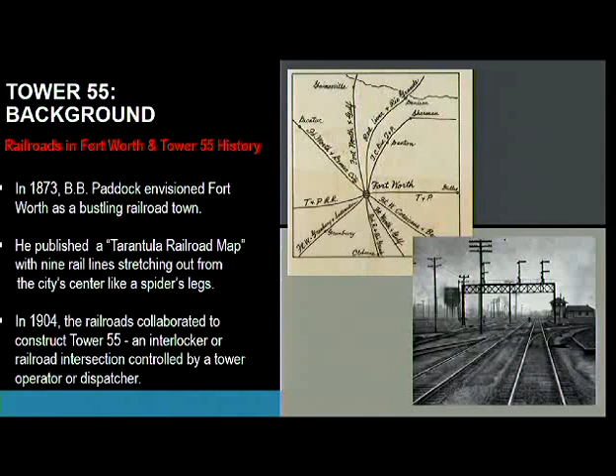So, like was mentioned before, after a century of functionality here, Union Pacific and Burlington Northern Santa Fe currently are the two Class 1 railroads who meet at Tower 55. Amtrak has 4 trains that are also served by the tower. The different cargoes that are brought through are intermodal goods, agricultural products, coal by the tons. Half the traffic's probably coal trains, then industrial and manufactured goods.

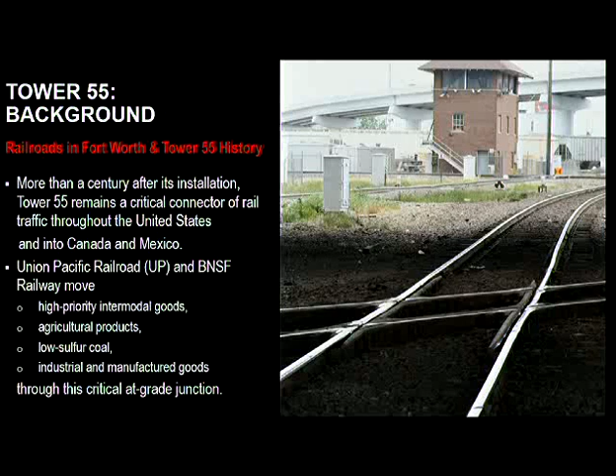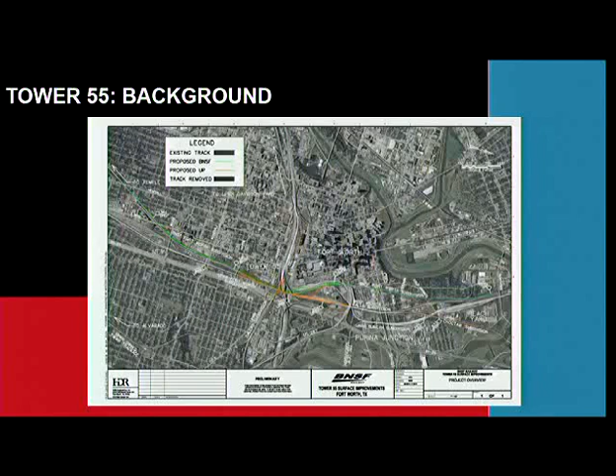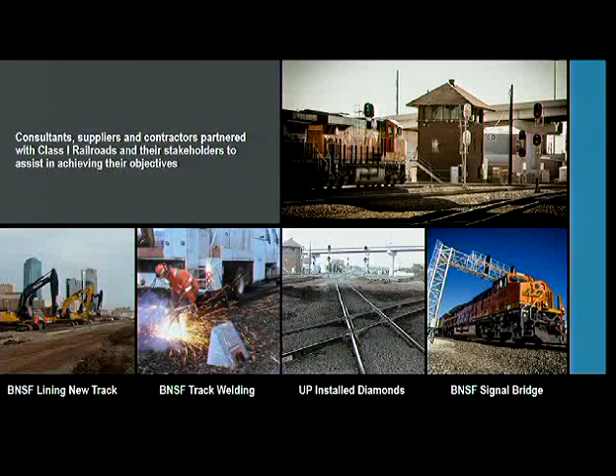Now, consultants, suppliers, and contractors all partnered from the pre-bid process, developing what materials were going to be required or would be best suited to the project. We met with BNSF and Union Pacific, as well as Amtrak, and other outside stakeholders, including property and land developers adjacent to a couple of the crossings that were closed, and grade separations which were improved. We also met with Fort Worth Independent School District as well.

Now, from the get-go, HDR assisted the railroads in multiple facets. One thing we did, we assisted both railroads in the modeling. On the BNSF side of life, their transit times had increased more than 30% since 2002. And some of their trains were staged all the way from the Oklahoma state line and southward to Temple, where it begins 2 new subdivisions. They'd be staged there for approaches into Fort Worth. That impaired their growth and sustainability at Alliance Intermodal Facility, which is located just north of Fort Worth.

Union Pacific, that impacted more of their east-west traffic, which they would stage 30 miles to the west in Weatherford, all the way out to Abilene, which is 130 miles west, to approximately 80 miles to the east of Dallas. And this impaired their services to their South Dallas intermodal facility, which is less than 10 years old and still increasing in traffic.

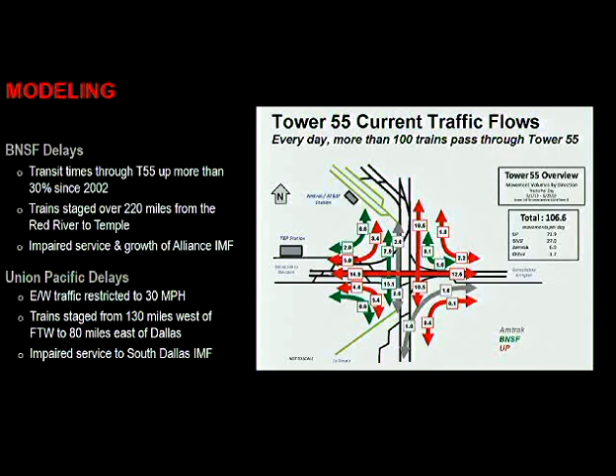We also assisted the railroads from the financial standpoint. When this project started, that was before President Obama was elected. Therefore, a lot of the funding that we used didn't even exist. But once he was elected and instituted the TIGER funding, it changed the whole program when the railroads went and applied for public funds.

So we assisted the railroads in developing the applications, the paperwork, the reports. We worked with the BNSF and the Union Pacific, as well as the FRA, and TxDOT was the sponsoring agency in Texas. So once we obtained TIGER II funding, that was $34 million from the USDOT. The breakdown of how the funding was for the project: Union Pacific $39 million, BNSF $37 million, the $34 million from USDOT. Our local council of governments was $2.5 million, TxDOT $1 million, and City of Fort Worth $1 million.

Then from the engineering and management perspective, they had a preliminary 10% design that had been developed by another firm as well as with the railroads, and base agreements or handshake agreements had been made, but nothing in writing. We took those 10% design plans, evaluated them, saw some problems that would have stopped the project, like going through the oldest cemetery in Fort Worth and knocking out 13 graves. But, you know, things like that. We made some modifications, took it back to the railroads. They approved them, and we forwarded the design.

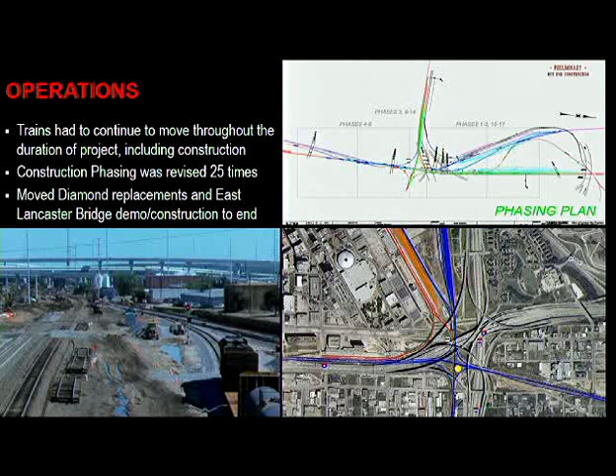Right here at Tower 55, the diamonds where the tracks cross each other, those had to be replaced. They were a 2x2, 2 tracks going over 2 tracks. Those had to be cut out, and we replaced them with 3 north-south diamond tracks going over 2 east-west. Then we also had to replace a bridge that both railroads ran over. Both of those bridges were actually separate, even though they appeared to be a single bridge, and we did that in phased demolition and reconstruction as well. What we did, we moved it to the end of the project, which expedited the overall project schedule.

Now, when we were looking at the structures, some of these great improvements, from my particular standpoint, working with the BNSF, this is one particular bridge. This was a 9-foot, 9-inch vertical clearance, just barely wider than a single lane of traffic, and it was skewed. Emergency vehicles nor school buses had ever been underneath the Santa Fe BNSF through its history. So we took that, we envisioned this, and then this is what was actually built. We went from this phase to putting retaining walls, additional sidewalks on each side, so we improved pedestrian safety and access to the schools and future businesses and residences.

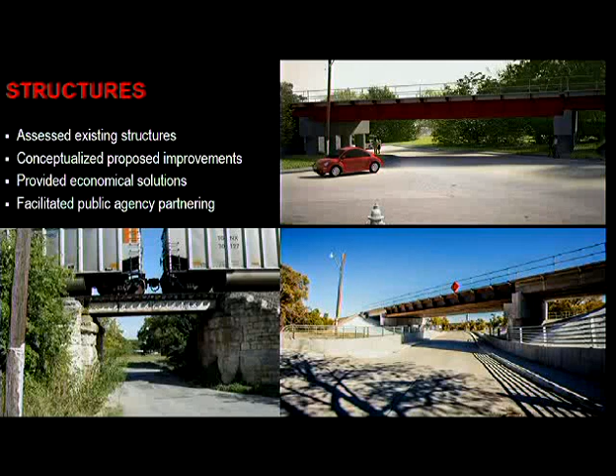Then on the track side, this is where Tyler and I had a lot of fun modifying things multiple times, but we developed track alignments based upon the operation models that were handed to us by both railroads, and then we helped meld both of their programs together in the design phase, even down to making sure the survey was tied together on the same state plane coordinates, so we knew where the track centers were in relation to each other in real space.

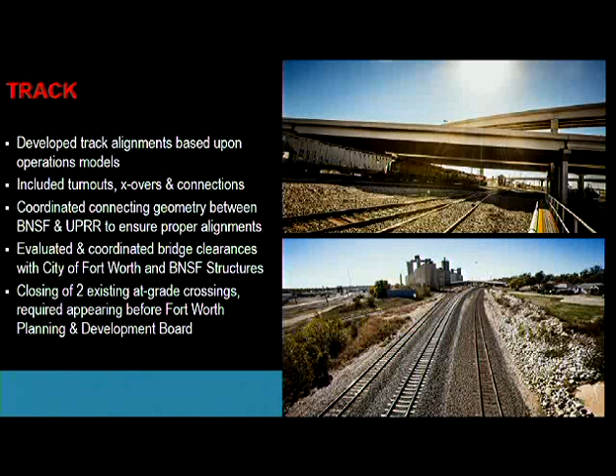We also evaluated and coordinated the bridge clearances through the City of Fort Worth and both railroad structures departments. We ended up closing 2 existing at-grade crossings to improve traffic flow, rail traffic flow, and improve bicycle and pedestrian traffic for a local school.

With a project of this magnitude, it wasn't just moving a bunch of tracks around. If you move tracks, you've got to move signals as well. And like I said, both railroads improved their block signal system. Their signal and communications also included PTC coordination and installations. This is one location where the BNSF was installing one of the PTC control units beside the signal block.

But with the final track design, the signal guys always want to see the final product versus working with you from the get-go. And that was a little bit of a challenge, but we were able to get plans developed far enough along where we could provide it to them, they could begin working with their designer. And we ran pretty parallel right up to the beginning of construction, and then the signal guys had to wait till about halfway through construction before they could start getting their foundations and facilities set in the ground.

Let's see, we also provided additional signal equipment, the berms for the bungalows to be located, the signals to be located, generator houses and such. And even at the end of the project, the railroad came back and said, well, we want to be able to have alternative power, so we were providing gas energy sources to them rather than just electric. So it was always a moving target.

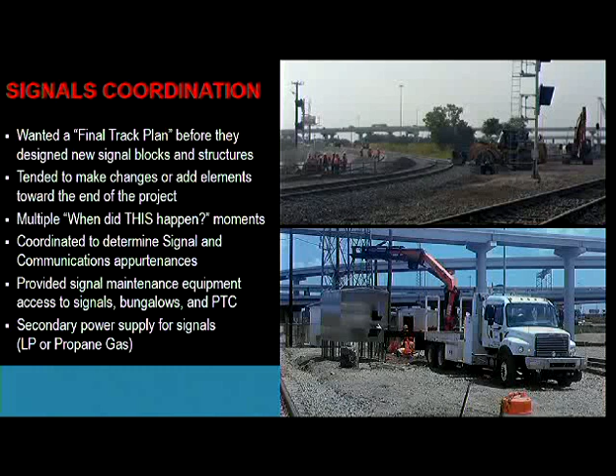Then with the city coordination, we went through the City Planning and Development Board for closing the 2 crossings. We coordinated through the Fire Protection Engineering Department to ensure that we had emergency access during traffic phasing. We were also installing traffic signals for 2 intersections. Since we were closing 2 existing at-grade crossings and improving clearances, we changed how the fire department and the police department had ingress and egress to 2 separate neighborhoods adjacent to the projects.

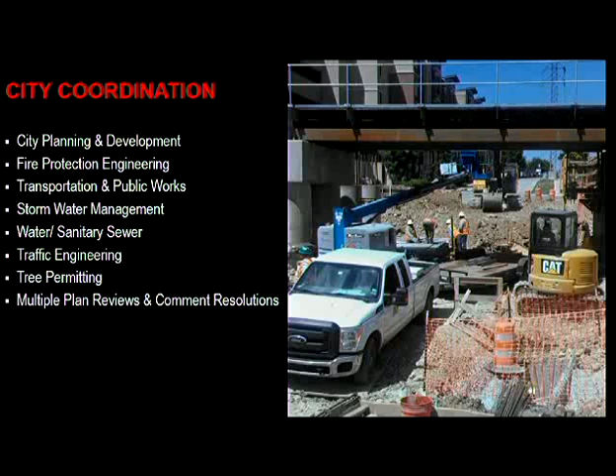We also worked with Transportation Public Works, the storm sewer, the water department, traffic engineering. Tree permitting is always an issue with most large municipalities. And then we have multiple plan reviews and comment resolutions through the city.

Now, adding value to a complex project, sometimes that sounds overwhelming. Other times you think, well, that's nothing. We can do it. So you go and you have to do an analysis on your project and how you can best provide logical, timely, and economic solutions with your clients, not just for them. And when I say with, that means being involved in a dialogue. You work with them to a level where you gain their trust and they understand your professionalism and your knowledge. So you work as a team to provide the best solution to their problems.

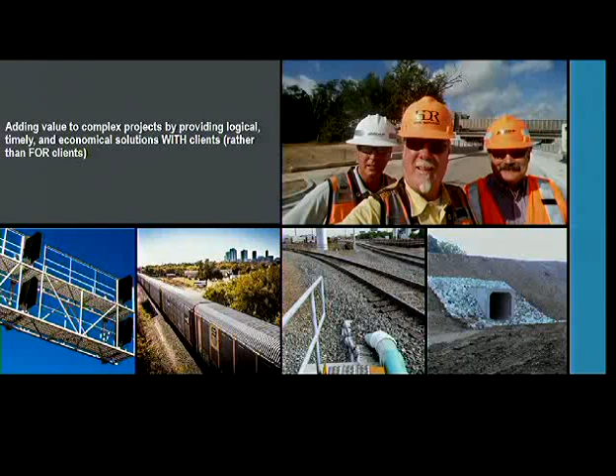Now, this is a real issue, and sometimes it's really simple. There is a way to save time and money, and always remember, time is money when you're in the construction phase. During the design, we had a really tight right-of-way along the BNSF, and this was a series of 5 conjoined buildings, distribution buildings, that would have been multiple $1 million. But what we did, we recommended a retaining wall with adequate clearance from the back wall to the railroad right-of-way.

In this photo here, during the construction phase, the contractor was having a hard time staying within his own schedule. So what we did, we had a conversation with the contractor and the railroad and recommended removing the lime stabilization, or the chemical treatment to the subgrade, and we recommended biaxial geogrid material to be installed, which saved money all around and then saved time, because we probably saved a month worth of cure time on the subballast if we'd installed lime. Another example, bridges are always more expensive to build and to maintain through life cycle.

So this bridge really wasn't there for drainage. It had been built at a time when this section of Fort Worth was more agricultural, and there had been an irrigation trench coming through here. It no longer functioned that way, so we recommended and designed and installed a concrete box culvert. It's backfilled. They don't ever really have to look at it but once a year.

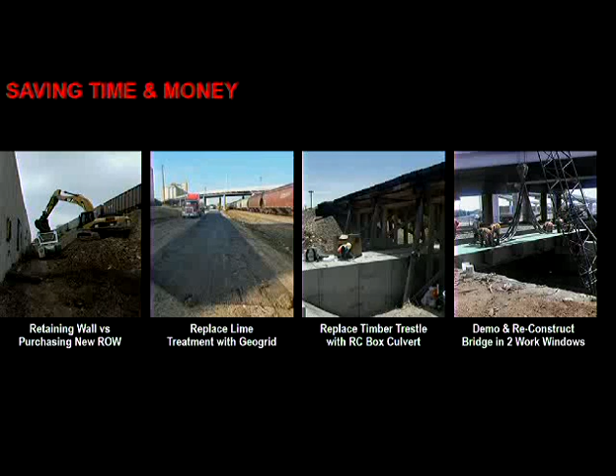And then this is where we moved the demolition and the reconstruction of 2 bridges to 2 consecutive weekends at the very end of the job, like 3 weeks before all the track was completed and we were preparing to walk away from the project.

So then we have the construction management team. Once we were out there, I had a staff of 6 people on a daily basis, and we developed the materials testing schedules. Remember your concrete lab and all that, everything you learn there, it actually gets executed out during construction.

We developed construction observation schedules, as well as the folks out there looking at our structures, our bridges, our culverts, our retaining walls, everything that, then when it came to the city construction, we coordinated and provided information to the city inspectors and engineers as well.

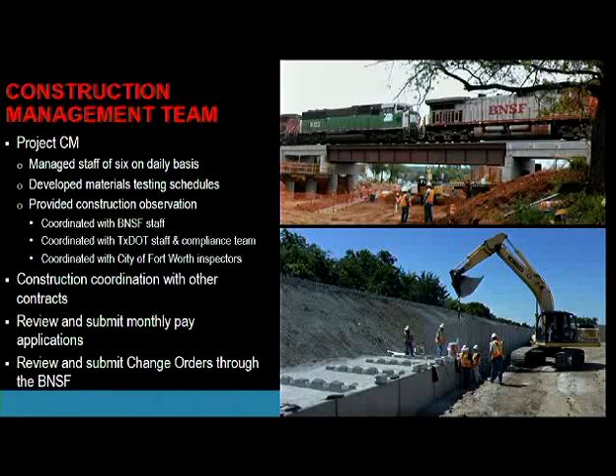Our responsibilities also included the paperwork and the change orders for the railroads, as well as coordination with the state and U.S. DOT on a monthly basis. Project safety. That's something a lot of people take for granted, but it can either save your life or get you kicked off the project if you're caught not being safe.

Some of the instances that a lot of times you take for granted is just how close or what kind of equipment you're working around, even if you're not in control of it. This is railroad's track gang, but you see the back end of that track hoe lifting up off the ground, and they're moving and pulling that track. If a chain breaks, you don't want to be in the way of shrapnel and projectiles.

Sometimes you're working close to live tracks, and there comes a train at 30 miles an hour passing by you, or you might be up on adjacent structure with live traffic. You've got different materials you've got to be aware of. Even with concrete, you can get chemical burns. You want to make sure you're paying attention to what you're doing, or overhead movements of structural materials or other materials being delivered.

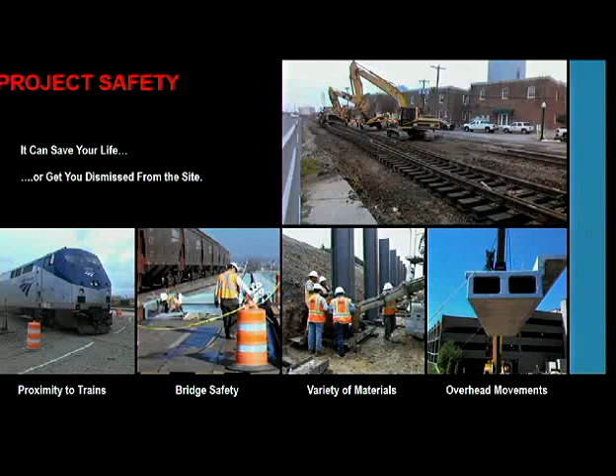Some of our construction observation activities included the placement of bridge girders and cast in place components of the bridges, be it the drill shafts, placing the cans, the rebar for reinforcement, and then pouring the concrete for the substructure, and then setting the superstructure like shown in that last slide.

Also, during embankment construction, you're testing your moisture and density as you build up every half foot to 8 inches. Sometimes you have differing conditions, not only the weather, but we did night work out here as well, sometimes required 24-hour cycles.

This is where Union Pacific was working in the summer, I think in July of 2014, the night they removed the existing diamonds, excavated the old sub-ballast out, put down geogrid, asphalt material, sub-ballast, and then had a huge crane drop the assembled 3x2 diamonds in place and set them up, and they had slow order, but they had trains running by 6 the next morning.

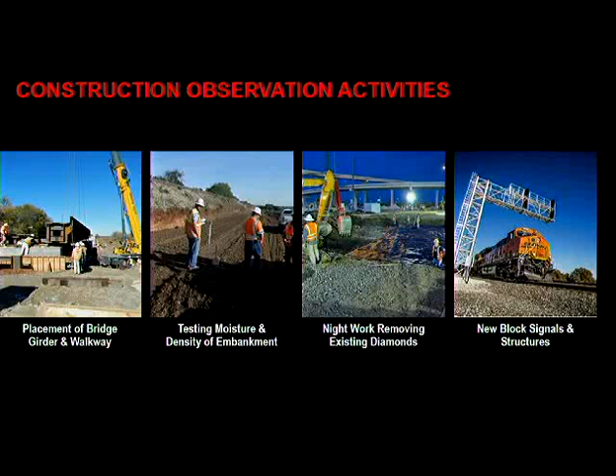And then, like I said, too, in working with the signal department, you have various kinds of structures, different types of signals on wayside or overhead, as well as their appurtenances.

I'd been in transportation for probably 20 years and working in railroad for 5 years, and I never got the chance to be around the track laying machines. I was always out there getting all the civil work done, structures, having everything ready for the track to be laid. This particular series is the BNSF's track laying machine.

And what they do is when you have the sub-ballast ready and approved by the engineer, they will line out all this continuous welded rail adjacent to where the center line track is already surveyed in and staked and string line. This is actually a train. They have multiple flat cars with concrete ties ready to be set down, and this yellow portion of the train is actually a bridge, rubber tires on the front end being pulled by a Caterpillar dozer, and as it creeps along, it sets all the ties in place.

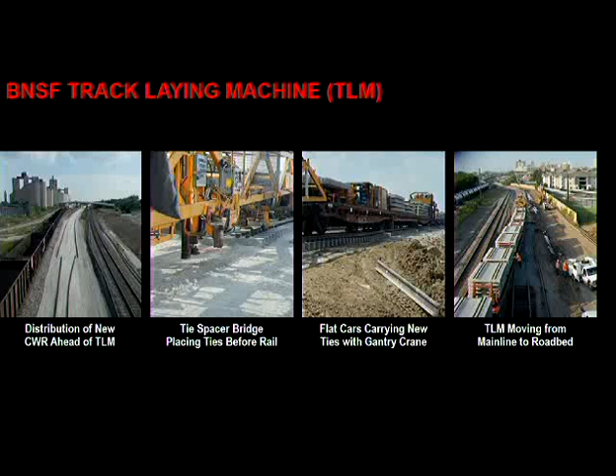Another portion of the train then grabs the rail and sets it up in the tie plates, in the seats, and then as it goes along, they assemble the clips, and you've got a skeleton track ready to go. They'll have ballast on it that afternoon or the next morning.

Now, some of the lessons learned and how we have translated them into value-added services. Before I jump off of this, like I said, I wanted to expose y'all to various things. This is some eye candy, so I'm not just going to run over this, but here is some of the day work after the new diamonds had been set in that morning before they opened it to traffic.

This is some of the work we did that, because this is an older bridge structure, didn't want people having to come in there. There's no longer the bridge. This is where that former timber trestle was when we put the box culvert in. You don't have quite the same access, so they aren't going to be out here wanting to maintain and herbicide the grass. We put the rock riprap, and it also helps with maintaining the slopes in case of heavy rains and water rushing. This is also where the railroads were managing the city utility improvements.

And then out along the Amtrak ramp, we did get into an area where we found some contaminated soil, so you have to be prepared on how to handle that, getting the proper calls, the proper permits and paperwork done, and expedite the removal and disposal of that material.

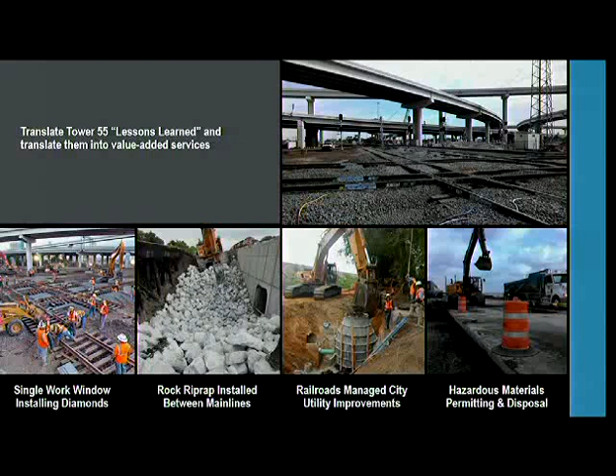So results now in trying to exceed our client/owner's needs and requirements. We began the construction in March 2013 and completed the construction less than a year ago in December of 2014. Substantial completion was in September of 2014. Of all the bids received, they are approximate to the engineers' estimates. Actually, on half and half, the engineers' estimates were dead center between all the submitted bids.

And we executed all the, and I say we, both railroads, because it was a combined contract with the USDOT FRA. All the contracts were executed within the flow-down agreements that were signed between the different agencies and the railroads, within those guidelines, within time, and within budget. And actually, BNSF, I don't know about the UP's final bottom line. BNSF actually was 0.5% cheaper than was originally bid. It goes a long way when you can do that.

This slide here is a presentation that Union Pacific and BNSF had at AREMA, but it's pretty interesting because you get to see some of those work windows with a lot of work being done within just a couple of minutes.

So, let's see here. No, that's not what I want. You have to click here. Okay, get it? Okay.

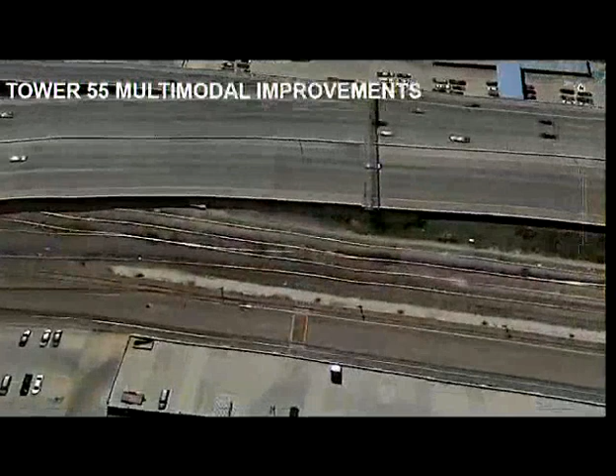You can see the high rail equipment, the tampers, as well as the regulators, trying to finish that track after they got it laid in place. Here's a month later, then 2 new main lines to put a total of 4 back freight main lines in service. Union Pacific's largest yard in the area is located about 4 miles to the west of this location.

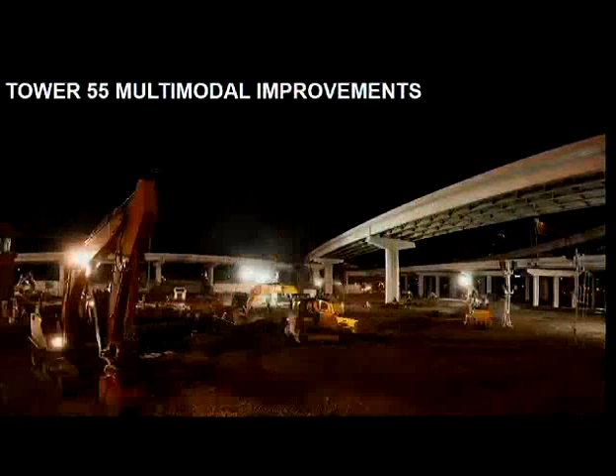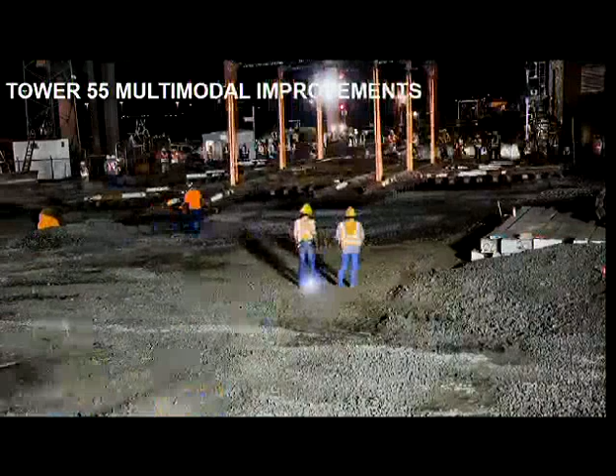This operation, since Union Pacific actually controls the tower and access through the tower, they were in charge of all the removal and construction of track on this weekend. See the moon down there? And I wish you could really see that crane, because it was the second largest crane I've ever seen. You can see it in the background over here on Saturday morning.

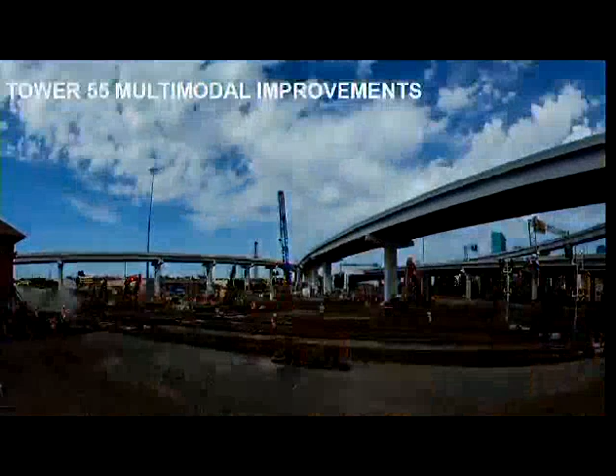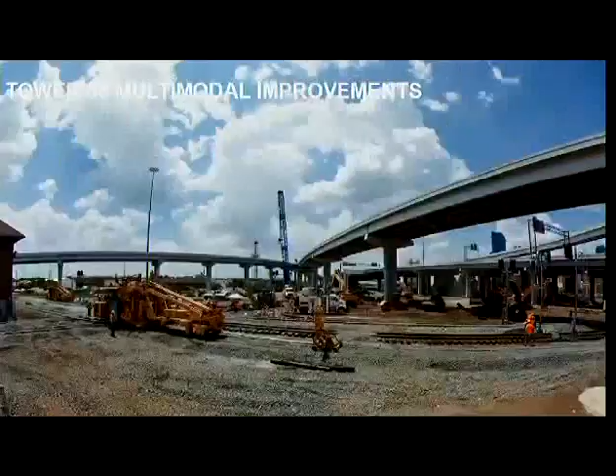What made it interesting, Union Pacific had brought in a crane that's sitting just out of the screen. Had been there for a week, and the day before everything was supposed to happen, they blew hydraulics right out of it. Had to find a new crane. They shipped it up from Houston, had it ready to go that morning early, and moving that afternoon.

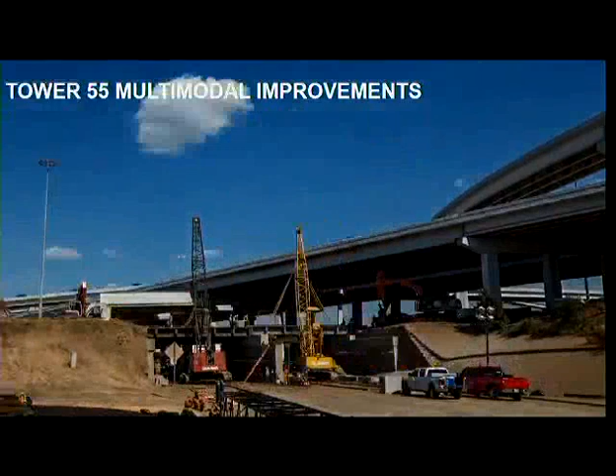On that particular bridge. Those were bridges of different eras, but all of them were at least 80 years old iron and steel. We cast them within reinforced concrete to make it look new and reinforced, and then set new headers up there and new steel girders for both railroads.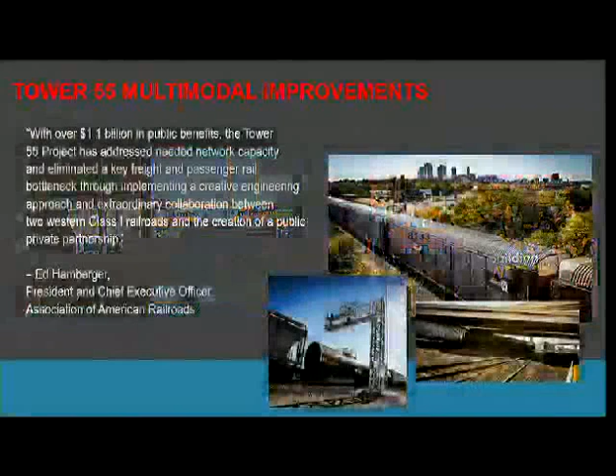So Ed Hamberger, who's actually the CEO of the Association of American Railroads, had this to say: that with over $1.1 billion in public benefits, Tower 55 has addressed needed network capacity and eliminated key freight and passenger bottlenecks through implementing a creative engineering approach, an extraordinary collaboration between the Class 1 railroads, and the creation of a public-private partnership. You will learn that little catchphrase because it'll probably be implemented for the rest of your career. 3P, or public-private partnership, using private and public monies to expedite a project.

This also has brought on follow-up projects to go along with it. The USDOT FRA approached the railroads about monitoring the success of this project to ensure that the public money was invested properly and was worth its investment. So what we're doing, we had the baseline trackage alignments. We did modeling to show impacts to 10 different grade crossings around Fort Worth and its suburbs, air quality, and then we are to do that each year, 5 years after the completion of construction. So we are completing the first round of follow-on monitoring and documentation now. We've got 4 years remaining.

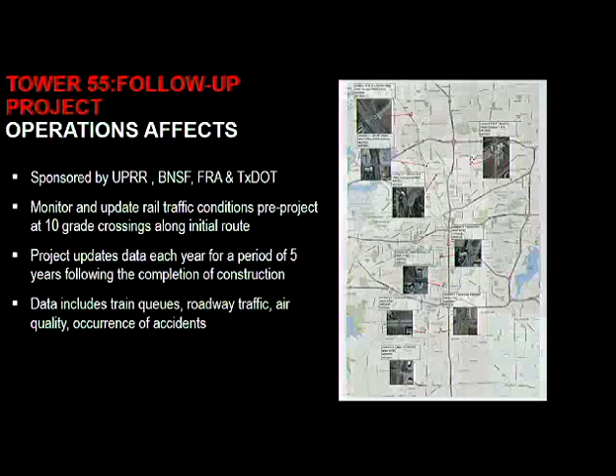Then, as Tyler noted before, the Tower 55 project won the Hay Award from AREMA last month, and we were also notified that AASHTO had presented the 2015 Presidential Award.